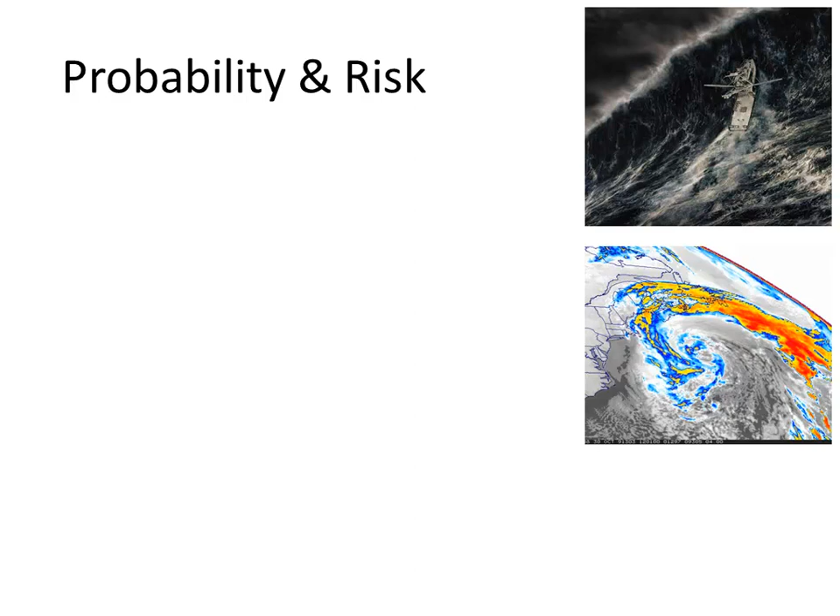That stars George Clooney and Mark Wahlberg, right? Yeah, as fishermen out in the North Atlantic. And I remember that storm, it actually flooded some parts of the town I grew up in. Really? Where was that? In New Jersey, Tuckerton. And what year was it, do you recall? 1990? 90? Yeah, I was pretty little at the time, but yeah, I do remember it. It was a big storm, and they say it was a perfect storm because it doesn't come around very often.

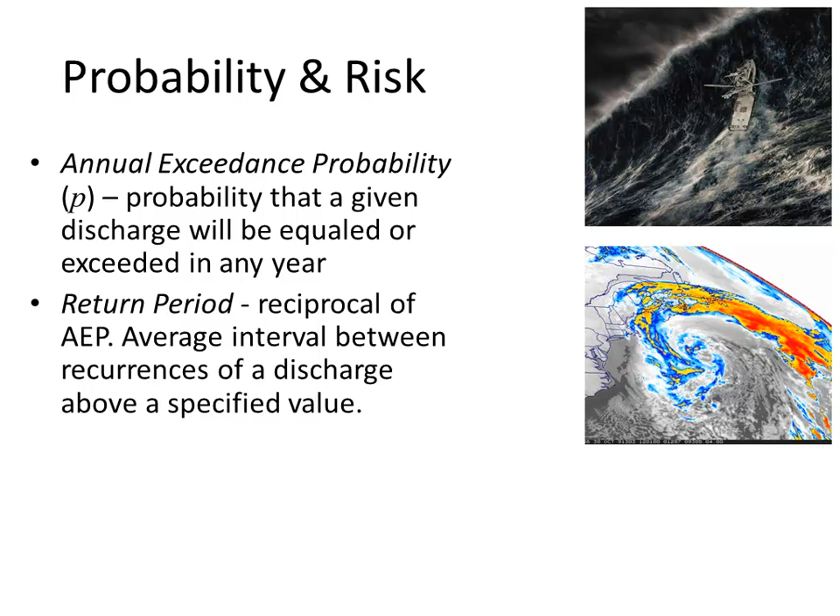The first couple of problems in your homework assignment for Friday are related to probability and risk, so I wanted to point out the relationship between probability and risk. In any given year, there's a probability that a certain size storm would occur. This 100-year storm they had out in the Atlantic Ocean, in any one given year, has a 1% probability of occurring. So probability and return period are reciprocals of one another. The annual exceedance probability of 1% is the reciprocal of the 100-year storm.

Now, the relationship between risk and probability—I wonder if I didn't bring my notes today, I'm going to have to go grab those. The relationship between risk and probability is shown on the screen here. So if we have a 200-year storm, then the probability of a 200-year storm is 1 over 200. And if we want to know what's the risk that one of those storms will come through during a window of time that's a 50-year period, maybe a 50-year period being the design life, so N would be 50. What's the risk that we'll have a 200-year storm come through in a 50-year period?

You might just think, well, it's a 25% risk, but actually it's not quite that simple. So 1 minus the probability, 1 divided by 200, and that is to the 50th power. So I didn't bring my notes, I'll do the calculations along with you, and we will find the risk.

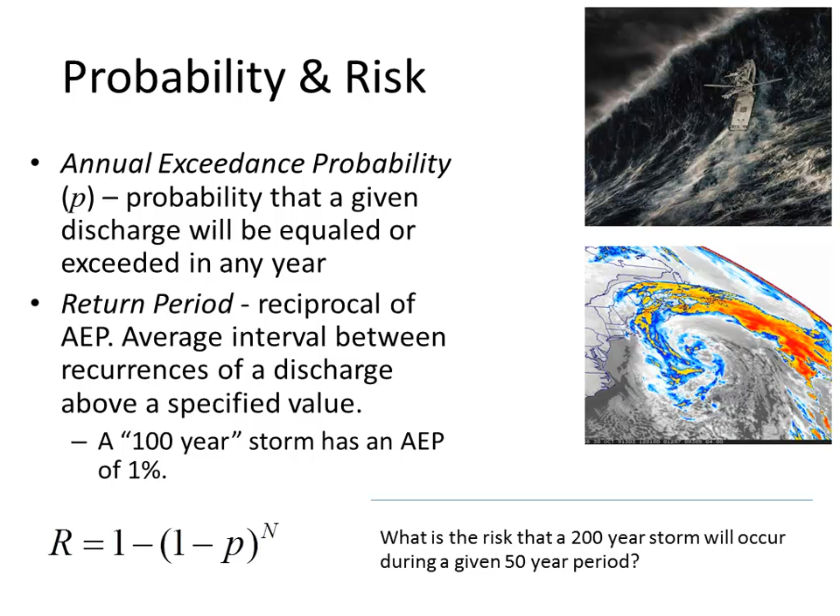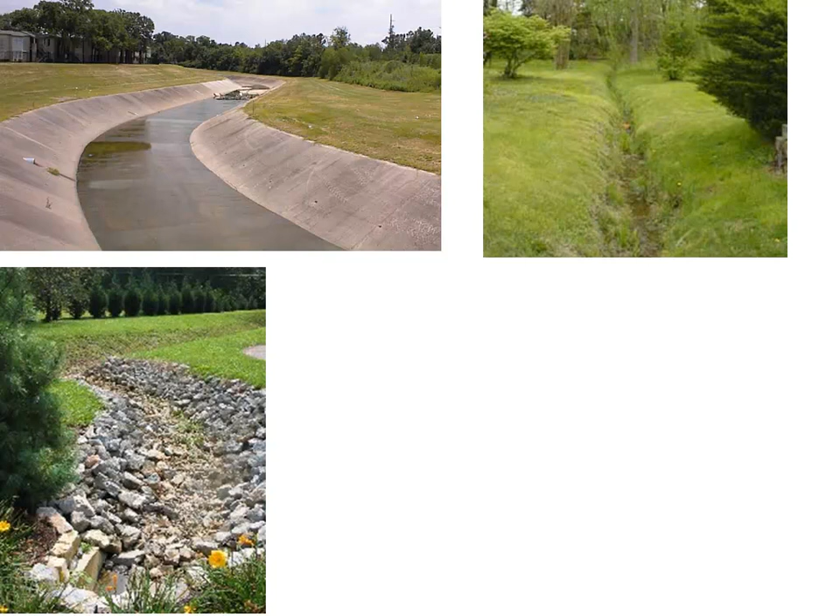An open channel may be lined with riprap, broken-up rocks, or concrete. This shows water coming from a culvert going around a bend, where they've installed riprap to ensure it's not scouring the earth, making it more durable as water flows out and joins the main channel.

What material to use and how wide the channel should be depends on factors beyond just the flow capacity Q that we'd solve using Manning's equation. There are other considerations that factor in, such as the velocity of the water.

Last time in class when speaking about sewers, we talked about how deposition of sediment in a sanitary sewer can reduce its capacity. Velocity is a concern in sewers, and also in channels like this, because we want enough velocity to scour sediment and keep it suspended, but not so much that it would damage the grass lining of a channel. So what type of lining to have, whether to put concrete on it, partly depends on the anticipated velocities.

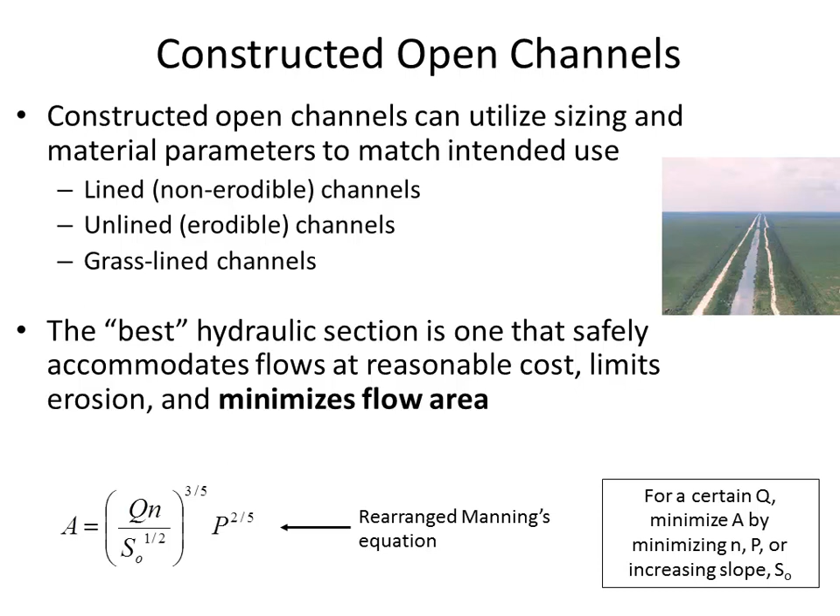So it's specified on the job, or sometimes you just have to use your engineering judgment. There may not be a code that applies, but the question you ask yourself is, how often do I want this to fail? In the case of a channel going through a neighborhood, people would be pretty irritated if water levels got so high that it flows into their yard.

So you'd have a pretty small appetite for failure there. But if it's in a rural area and this channel fails, maybe the nearby orchard just has a couple of inches of water for a couple of days, and you could probably tolerate that. So there's no sense putting a lot of effort into a great conveyance channel in a rural area where you don't mind failure.

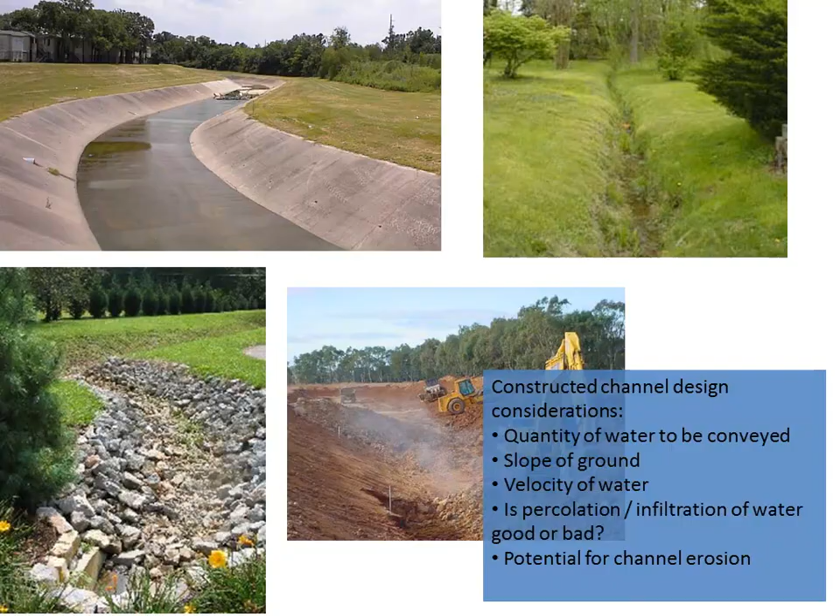Remember, our best trapezoidal channel was the one with side slopes of √3 divided by 3. That's talking about how steep the side slope is, and that's steeper than a 1-to-1 side slope. It's pretty steep to get this best trapezoidal channel that will have the most conveyance for its given area. Concrete only, or rock if it's excavated out of rock, though that's pretty unusual to do.

Freeboard is the excess depth you want to apply. You can notice that the water level gets to a certain point, but you wouldn't necessarily design for the water level to go up to the very top of the channel. Freeboard is provided in case there are wind-driven waves—you can imagine that on a windy day there might be some splashing of the water, so you wouldn't want the water all the way to the top. It may also just be excess capacity for a safety factor.

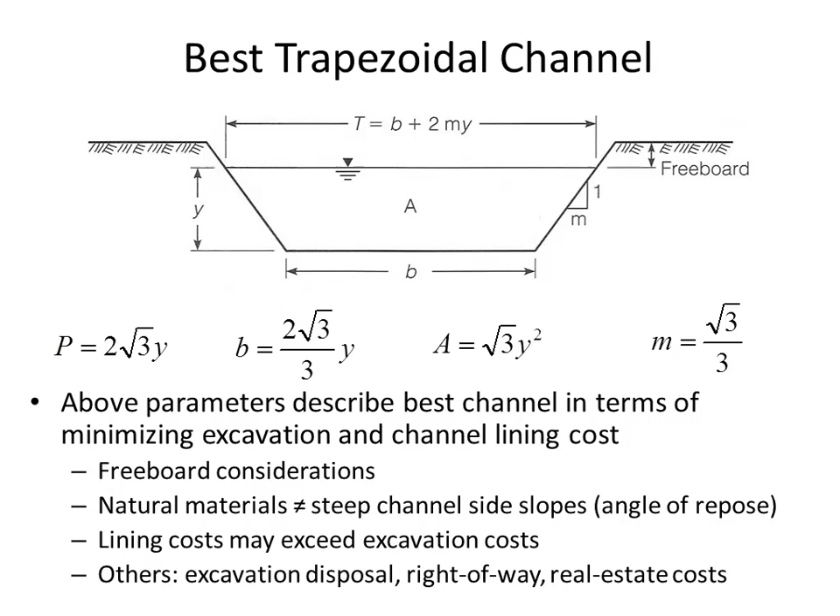The side slope, how steep it is, depends on what the channel is made out of. The overall costs to consider may include the cost of disposing of excavated material, and trying to avoid the expense of real estate and right-of-way. It may be more economical to have the channel be relatively deep and narrow to avoid purchasing a really wide right-of-way. Excavation may be cheaper than the real estate costs, so you'd make a deeper channel rather than a wider one. There's just a balance of considerations to take into account.

In addition to just keeping sediment moving along, a minimum velocity may be desirable to help avoid weeds growing. If the velocity is really slow moving, weeds can grow in the channel and can eventually choke it. But if there's always enough velocity to keep the weeds tipped over, it can inhibit their growth, avoiding the expense of mowing—sometimes channels have to be mowed, using boats that look like dredging boats to mow a channel and keep vegetation down. So slopes can affect maintenance issues down the line.

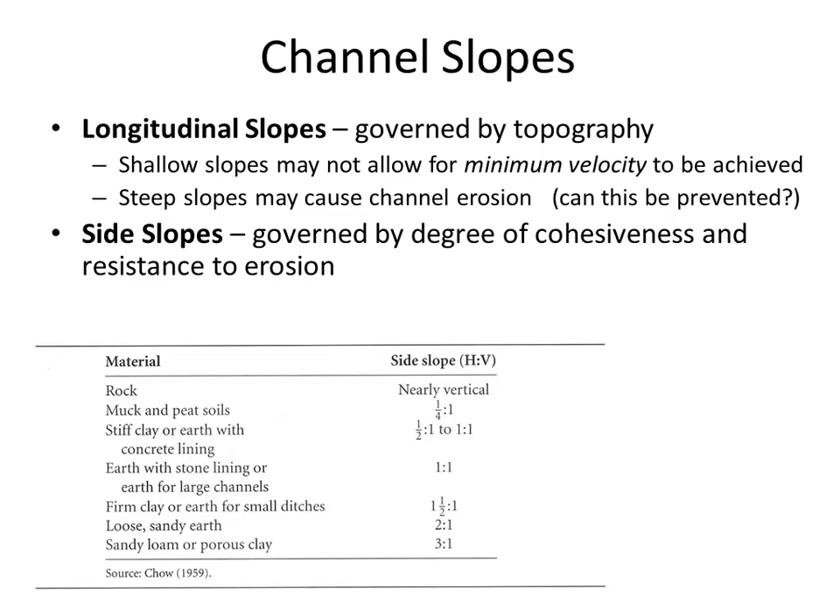All right, so freeboard, we talked about that extra capacity that's provided for wind-driven waves and safety factor, or superelevation around the bends. There's an empirical equation used to give a suggested guideline of how high the freeboard should be, in SI units. There's a linear interpolation of this factor C, and if you know the depth y and the expected flow rate, you can use this empirical equation to estimate how much freeboard is required.

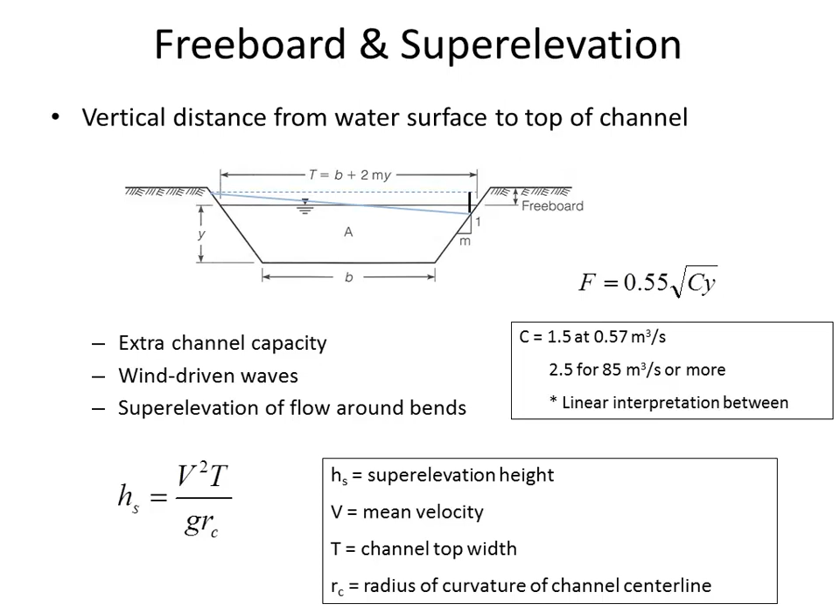This equation for superelevation height tells you how much vertical elevation difference there's going to be between the right-hand side and the left-hand side of a channel, based on the top width of the channel and the velocity the water is traveling. This takes angular velocity and the radius of curvature into account, and tells you how much of the water is going to slosh over to the left-hand side if you were banking to the right.

A lined channel is more expensive, but comes with advantages: for a steeper slope where velocities are going to be high, it can allow the steeper slope. And if you have a steeper slope, that also reduces the cross-sectional area required for the same flow rate Q. If water is expensive and you're trying to preserve it for irrigation or other beneficial uses, a lined channel will decrease the amount of infiltrated water.

To design a lined channel, you first select the material and the n value that goes along with that material. We estimate the roughness and the freeboard coefficient C, which is partly based on the flow rate. Then calculate the normal depth of flow with Manning's equation. Checking the velocity and the Froude number will let you know if there's likely to be concerns with scour.

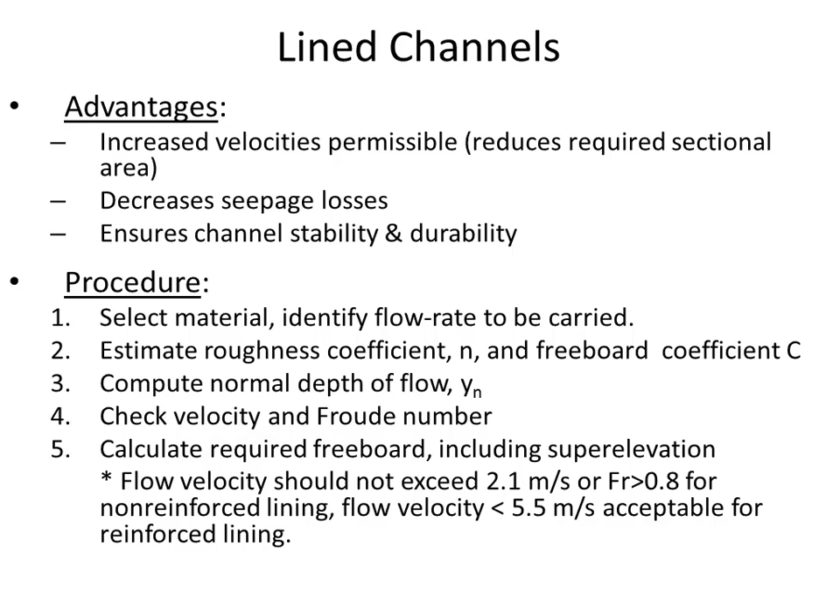The guideline is that velocity shouldn't exceed 2.1 meters per second for non-reinforced lining, meaning packed clay. If it's reinforced concrete, it's okay to have supercritical flow, up to 5.5 meters per second. If you're going to go beyond 5.5 meters per second, it's time to call in the big guns, because it's really going to be pretty dangerous, and it would have to be a specialty concrete in order to avoid scour.

So let's go through this design process where we're going to design a trapezoidal channel. The question is, how big should the channel be to carry 2.4 cubic meters per second, where we know the longitudinal slope is 0.5%.

While you want to be conservative, sometimes you'll assume higher than that. A kind of midpoint n value for concrete would be 0.015. So let's use concrete for this one. Concrete, midpoint n value: 0.015.

The freeboard that we're going to need here: if we interpolate the C value, C is 1.5 at 0.57 cubic meters per second, and 2.5 at 85 cubic meters per second. So essentially we're linearly interpolating between 0.57 and 85, where it goes from 1.5 to 2.5. We're going to be somewhere in the middle there, at 2.4 cubic meters per second. The slope of this is 0.01184, with units of no units per cubic meters per second, since C has no units.

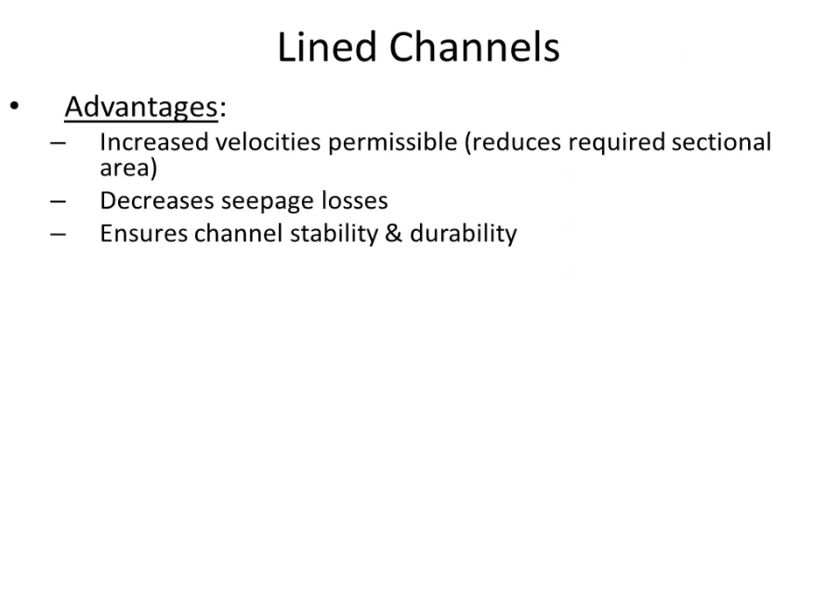You have to add the base to the wetted perimeter. I don't think so, this is for the best hydraulic section. Let's see here, where did I have those? Yeah, so for a trapezoid, the wetted perimeter is just a function of the depth.

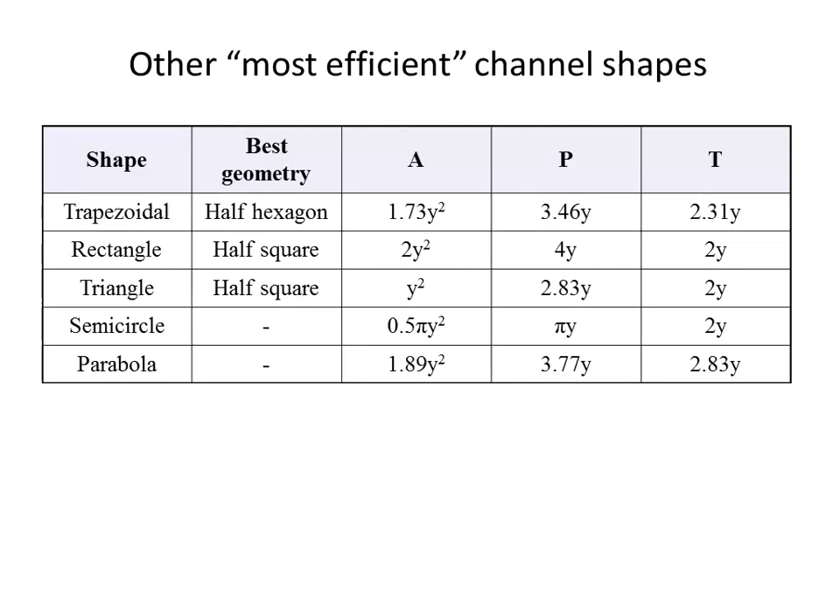All right, so Manning's equation: Q equals A divided by N, area divided by wetted perimeter to the 2/3 power, slope to the 1/2 power. We have 2.4 cubic meters per second, root 3 times y squared as the area, and our N value of 0.015. The area will be root 3 times y squared. Wetted perimeter is 2 root 3 times y, that's to the 2/3 power. And the slope to the 1/2 power. From that, we can get that the depth is

0.7514 meters. And then, based on the other parameters for wetted perimeter, top width, and everything else, that leads to the channel bottom width being 0.8676 meters. The side slope of the channel is 0.577, and the top width is 1.7357 meters.

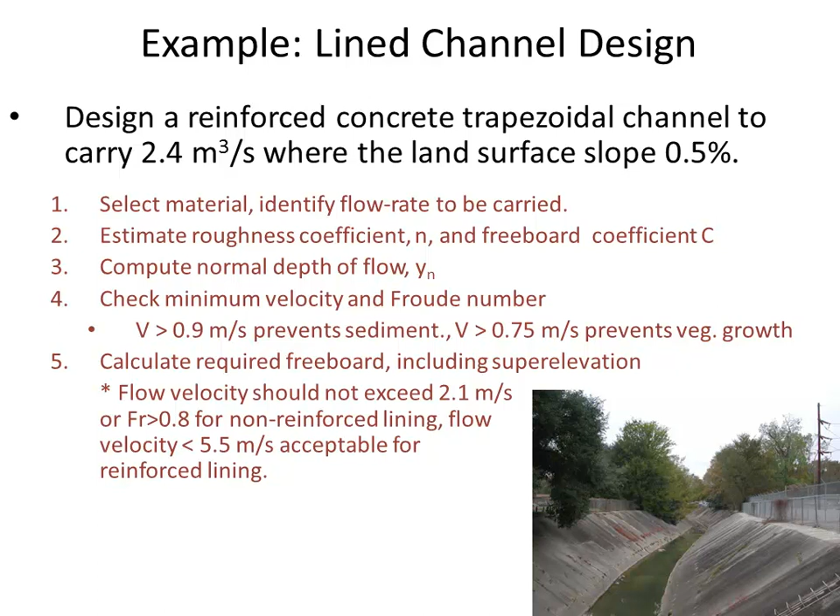Is it actually necessary to check it? Well, since we're using reinforced lining, probably not. Yeah, we've got concrete. Okay, just one last thing I wanted to point out, and I think you do have

a homework question related to this, is an unlined channel. So if it's an unlined channel, the cohesive strength of the soil is something that you're going to try not to exceed. If you have shear stress that's too high, it will shear the soil, the sand, whatever material has been used for lining the channel downstream. So you're trying to have velocities high enough that there isn't sedimentation of whatever particles are suspended in the water, but low enough that it preserves the integrity of the channel itself.

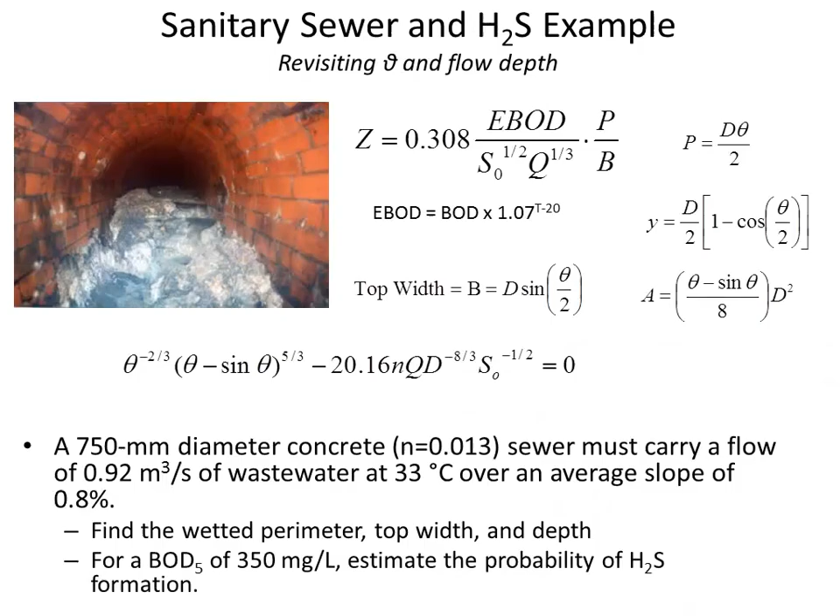And so the design process is similar, where you would do a geotechnical analysis and find out what's the maximum allowable shear stress that can be tolerated. And then from that maximum allowable shear stress, there's a relationship between... do I have it on here? No. Oh yeah, there's a relationship between the shear stress and the slope of the energy grade line.

So for example, in a homework assignment, if they told you the allowable shear stress in the soil, that would mean you have a known for the shear stress of the soil, and you could calculate the slope of the energy grade line, S of F, and then put that into Manning's equation and find out what cross-sectional area is required for a certain flow rate. In fact, I think that's the process you'll need to follow in the homework assignment that goes along with an unlined channel - with a given shear stress, solve for the slope, and then once you have the slope, put it into Manning's equation.